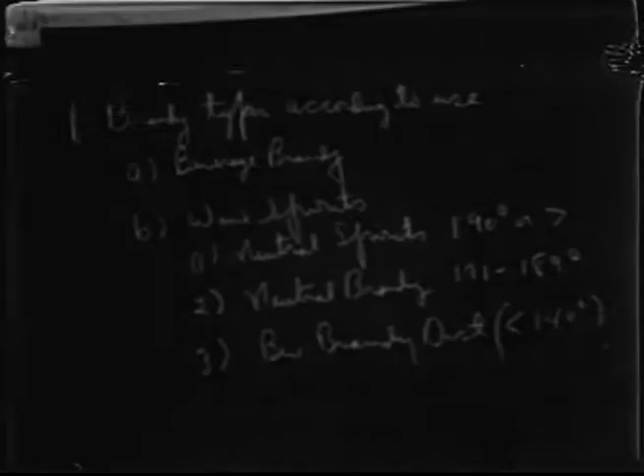Now, first of all, I've made a little brief outline here of a not official definition, but a kind of a definition of the brandy or distillate types as in accordance with their use in the wine industry. Fundamentally, there's two types produced, as far as purpose is concerned. The first is a beverage brandy, or beverage brandy distillate. Strictly speaking, we speak of a beverage brandy distillate as a material that's produced directly from the distilling equipment by distilling wine, and the characteristics of this legally is that the maximum proof of distillation is 170.

This is a rather simplified definition, and the legal definitions or standards of identity for brandy are rather complicated, and you arrive at this by eliminating the things that cannot be, rather than a straightforward definition. But in effect, brandy that is intended to be aged in wood and eventually sold for sale as a direct product, or beverage brandy, is generally made out of distilling material that is equivalent to the whole grape, that is a standard wine. Cannot be residue material, otherwise it would incur the appellation of residue brandy. So beverage brandy is made from wine, or essentially the whole part of the grape. And the other essential limitation is that it has to be distilled at 170 proof or less.

The purpose of that, ostensibly, is to ensure that it has flavor components retained in the distillate. Strictly speaking, it's not proper to call the distillate when it comes out of the still, which is colorless of course, beverage brandy, because it doesn't really become beverage brandy without qualifying terms until it has been aged in wood for at least 2 years and then bottled. We're getting into a few side points here which do refer to the legal aspects. For example, the law requires that beverage brandy be aged at least 2 years in barrels or in wood. And if it's not, it's called immature brandy.

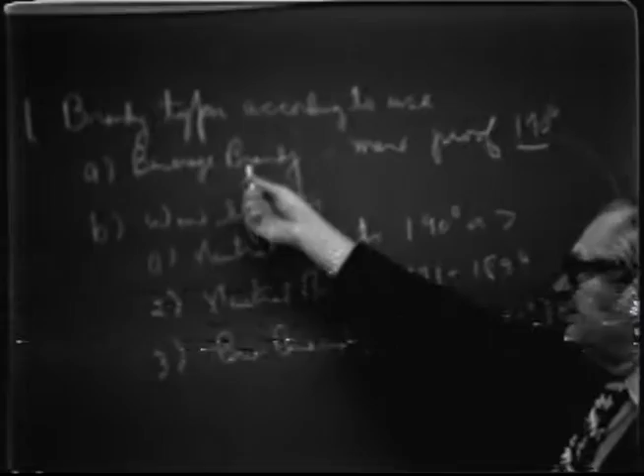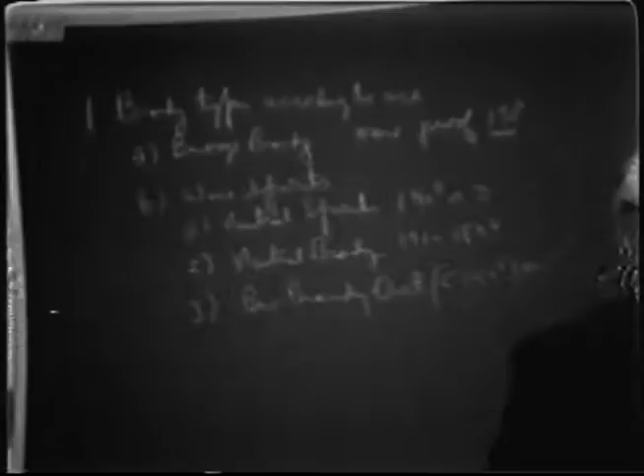What's the difference between beverage brandy under 1A and beverage brandy distillate under B? None, that's the same thing. This is just a classification according to usage. This particular material, although it's beverage brandy distillate, is primarily produced for the purpose of eventually selling a beverage brandy. That material can be used for wine spirits, as wine spirit - so there's some slight overlap.

Can number 3 be made from residue, or would that just be how it's labeled? No, beverage brandy cannot be made from residue, otherwise it would be called residue brandy. So the law doesn't preclude you from making residue brandy out of waste material, aging it in wood and bottling it, but the label has to say residue brandy, so no one does that. The law also doesn't preclude distilling at 180 proof, aging in wood and selling it as brandy,

but it has to have the word neutral on the label, so no one does that. But if they decide the advantages might override the disadvantage, or what they might presently call the stigma of the word neutral, they're perfectly permitted to do so.

This leads us into a little discussion about distillation itself, and perhaps an attempt at some definition of the word distillation. Most of you are aware of what it means - it's a process by which you cause a liquid to be converted to a vapor by the application of heat energy, followed by the removal of that heat energy by cooling and condensation. The condensate then represents a product which has effected some separation.

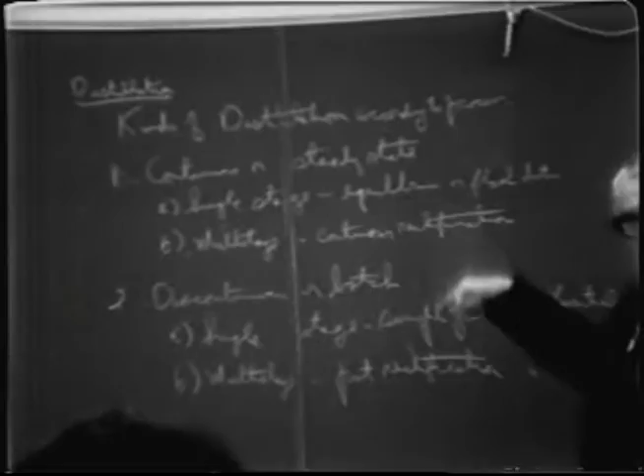But anyway, I wanted to just say a few words about kinds of distillation, classified in a simple fashion according to the process that's used. Later on, we'll have occasion to discuss each of these in turn in some detail.

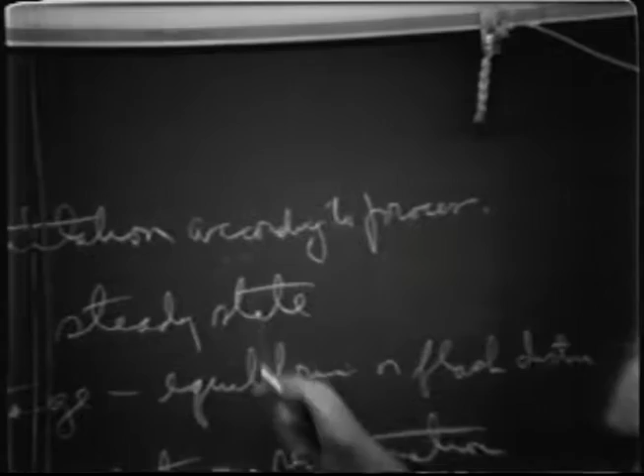So, first of all, I'd like to make the major classification according to the process into whether it's continuous or steady state versus discontinuous or batch.

As I think I indicated yesterday, a continuous distillation or steady state process is one in which the process, once set in motion, involves the introduction of a feed material or materials, that may be more than one, into a process at the same rate at which the end products come out, so that there's no depletion or accumulation in the middle.

Now you can have a little modification of continuous processes in which you do have either an accumulation or depletion of some component within the process, but in most cases in distilling, we're talking about a completely balanced process.

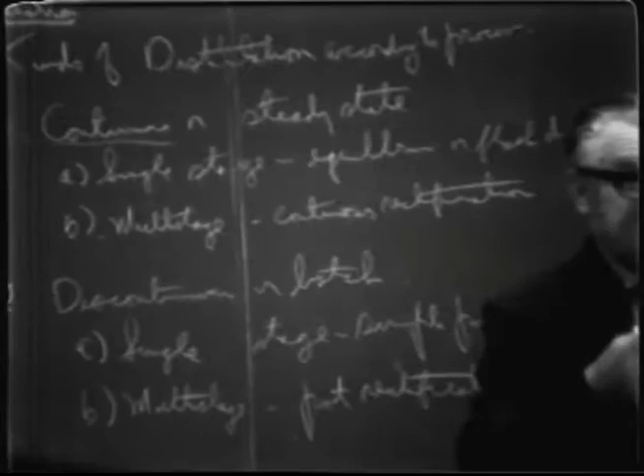Then we can classify this into one stage or one step of distillation. In other words, if you take a liquid and add heat to it and produce a vapor and condense it to a liquid, we have applied one stage of distillation. And we effect a certain separation, depends on the characteristics of the components.

The basis of distillation, to digress just slightly more, is the differences in vapor pressures. If we take ethyl alcohol and water in a mixture, generally speaking, ethyl alcohol has a greater vapor pressure than water.

So when it becomes a vapor, there's a relatively greater concentration of alcohol molecules in the vapor phase than in water. So when we condense it to a liquid, we have an increase in the alcohol content in the distillate. But water still has vapor pressure, and so a certain amount of water comes over.

Roughly speaking, if you took a 10% alcohol solution, the first distillate that'd come over would be around 5 times as much, maybe about 50% alcohol. As long as it was still 10% in the liquid, the vapor would be around 50%, roughly. We'll go into that more. We have charts which we can show exactly what it is.

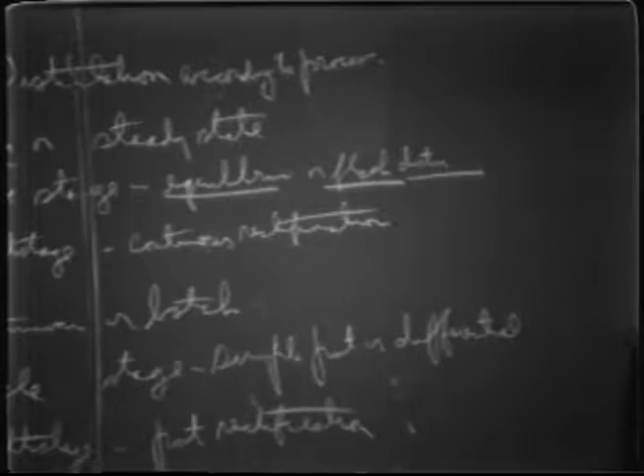So, we get a certain concentration in a single stage process, I mean, in a single stage of continuous distillation. In actuality, a single stage continuous distillation is not particularly used, that I know of, in beverage industries for production of alcoholic spirits.

But it is a useful process, and it involves what we call flash or equilibrium distillation. We'll talk about that more later, but this is sort of different than the other 3 types in that we don't use it directly in producing alcoholic beverages or distillates.

But the process that's most widely used, at least in the United States, for producing alcoholic distillates is the type we might call multi-stage continuous distillation, called continuous rectification, or rectifying distillation.

And I'll just go through this chart, and then I'll come back to that. But in effect, we accomplish this by having a column, which has several stages of vaporization, condensation. In effect, trays or plates in a fractionating column. We call it a fractionating column.

And so we have a repeated, in effect, a repeated vaporization and condensation, so enrichment at various stages. Several steps. A distilling column may have 10, 20, or up to 100 different stages in it, depending on what the function is and the purpose.

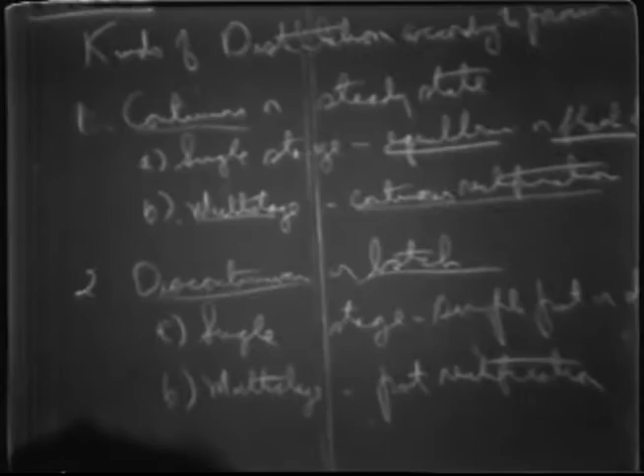Then we have discontinuous distillation, more commonly called batch process. And strictly discontinuous or batch process involves putting a material into an apparatus. As far as distillation is concerned, applying heat to the material and causing it to vaporize and collect the distillate, but no addition is made to the pot or the boiler until the process is ended.

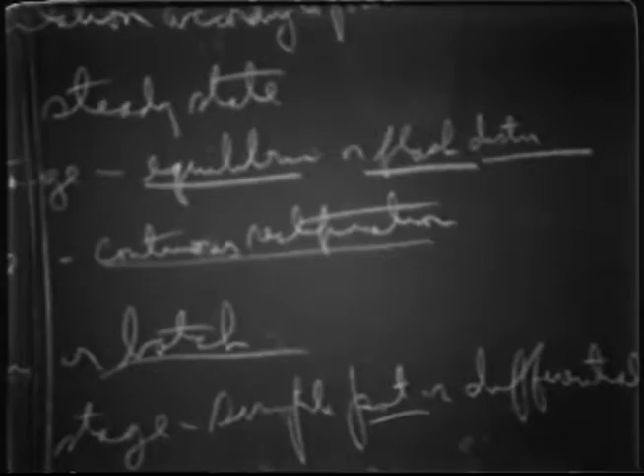So consequently, in the general nature of batch distillation or pot distillation, simple pot distillation, if it's only one stage, is that you have, as a function of time, a continuous change in the composition of the liquid in the boiler or the pot, as well as the distillate, naturally. And so you do not get a uniform distillate.

In contrast to that, with continuous distillation, we assume we have a constant feed material going in, so that the composition inside the vessel does not change and the distillate does not change as a function of time. But in batch distillation, it does change during the time of the process.

In the continuous process, isn't there a collection of some water? If the alcohol is coming off faster and the water's remaining behind, even though you're feeding in more of the beginning material? No, in a true continuous distillation, whatever water doesn't appear in the product goes out another product, the bottom product or waste, stillage, at the same rate that it enters. So what comes out is not only the distillate but also the waste, coming out in the same proportion.

I'll draw you a sketch of one in just a minute to show you the general process, and then in the laboratory today we'll have a look at our little pilot column, which shows you its features. So then let's conclude this outline.

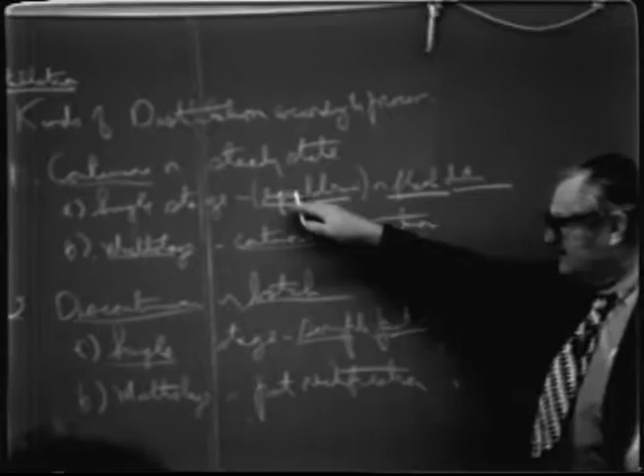Later on we'll stress the reason for those words. Now, just as we did here, we can have multi-stage, and we accomplish this by having a pot with a rectifying column or a plate column on top of it or connected to it. So we can effect, even in batch distillation, a significant concentration up to the desired level.

Let's say in one step, one process, or one operation, if you have a rectifying column attached to the pot, by pot rectification, you achieve the necessary concentration.

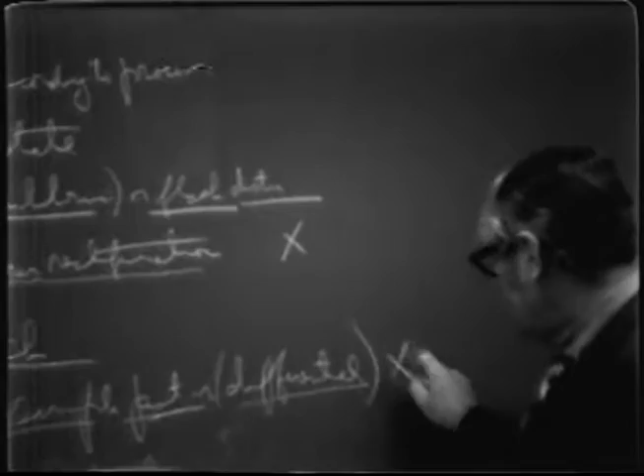Now let me say that this method and that method and this method are all used in the wine industry and the alcohol industries to produce alcoholic beverages. In California, the most commonly used method for producing beverage brandy and wine spirits is continuous fractional distillation.

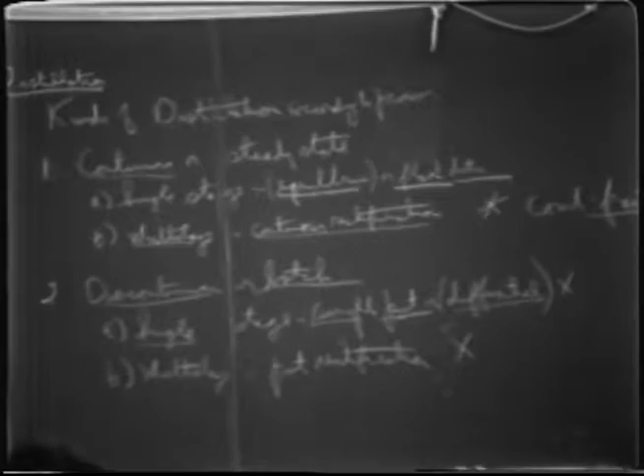However, the use of batch processes has considerable importance in the world, though very limited extent in California. I might point out that using a simple stage or single stage pot distillation, you normally do not produce sufficient concentration of alcohol to accomplish the desired end. So it is repeated at least once, sometimes a total of 3 distillations, but usually 2 successive simple distillations is the process used for producing cognac, for example, in France.

In fact, it's the process we'll talk about more in detail. That's so widely used that it's called the Charente method, Charente being the geographical department where cognac is located, or méthode charentaise.

2 successive simple distillations are also used in the Highlands of Scotland to make what we call the all-malt whiskies of Scotland, those which contribute most of the flavor to scotches, even though they're sold mostly as blends. This is another subject, but generally speaking, Scotch whiskey, you'll notice on the label, says blended Scotch whiskey.

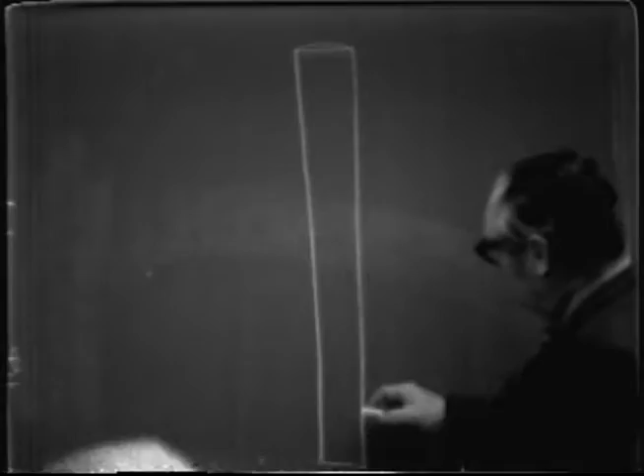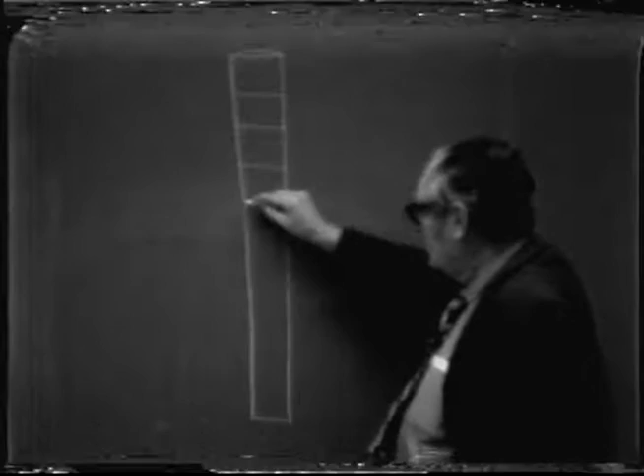The apparatus by which we can conduct continuous rectification, fractional distillation, usually consists of a column in which we have a series of trays or plates. Now, these may be of various designs, but the most common is what we call bubble caps.

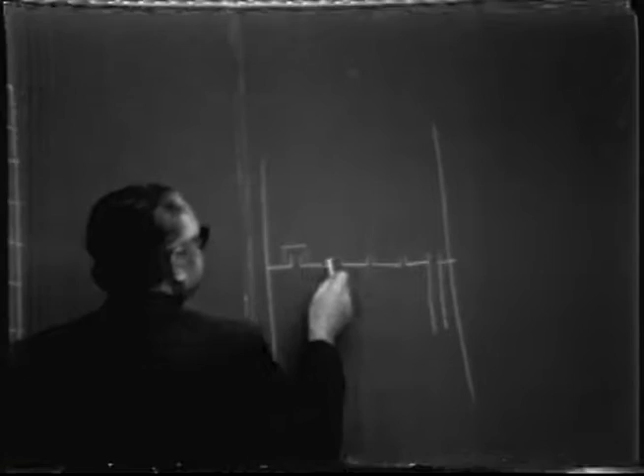A bubble cap tray or plate is a device that has, if I draw just a little cross-section on a larger scale here, a series of holes with risers, and over these holes are caps, called bubble caps.

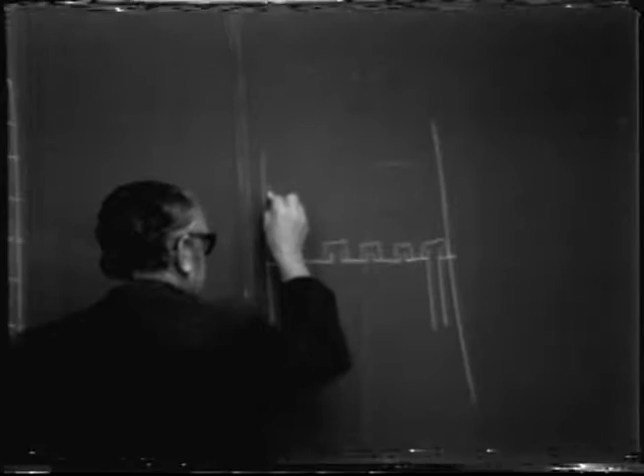From the tray above, which I won't sketch, there'll be liquid overflow coming down, an overflow liquid running down here. This could be in the stripping section, and would be the wine primarily flowing in here. Oh, excuse me, I didn't intend to put a cap over that one, because this represents the overflow down to the tray below.

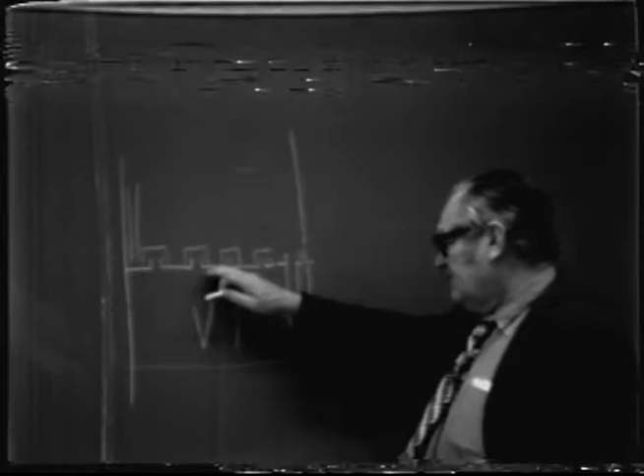So in functioning, we have a vapor produced at the base by steam or heat, and this ascending vapor rises up through here, and by the nature of this tray or plate, a certain level of liquid is trapped here because it has no way of getting out except to overflow at this weir, what we call the weir.

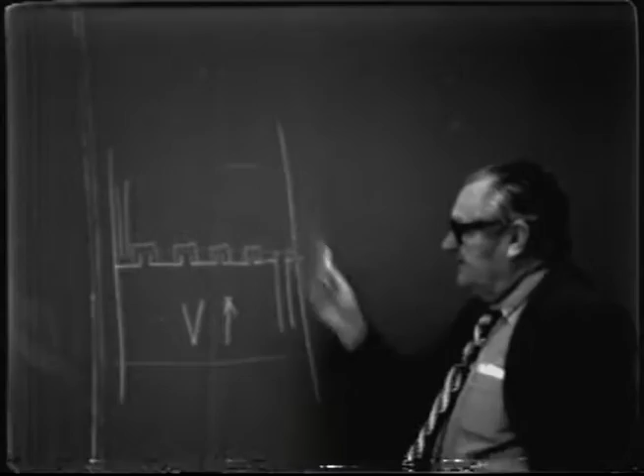The weir can be just the perimeter of the projection of that tube, or it can be some other type of weir that controls the liquid level on the tray. But anyway, the primary function of a tray or plate is to provide some mechanism by which ascending vapor can interact with, bubble through, or react with a descending liquid stream.

In effect, we produce what we consider one stage of vaporization at each tray. The liquid running down will give up some of its more volatile component to the ascending vapor, so that the vapor rising will be somewhat enriched in the more volatile component, in our case alcohol, and the liquid overflowing will be somewhat deficient in the more volatile component, namely ethyl alcohol.

This process is repeated from step to step, and eventually we have sufficient concentration of the more volatile component toward the top to produce our desired product, and we have sufficient removal of the more volatile component from the water phase by the time it reaches the base, to satisfy our requirements or specifications.

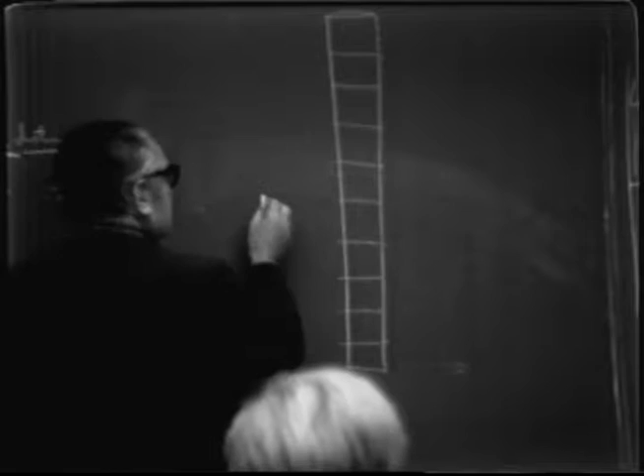Now, in reality, the simplest type of a continuous distillation column consists of two sections, divided by the point at which we introduce the feed, or the wine. Continuous distillation is used for many things besides wine, so the general engineering term would be feed, or the material that goes in to be separated. But in our brandy industry, the feed material would be the wine, or the wine-like material.

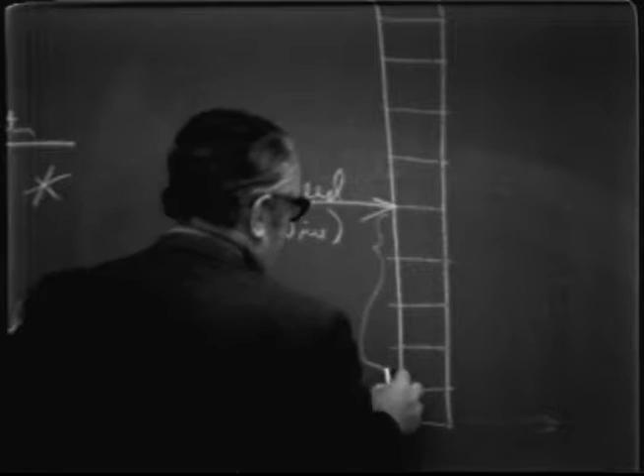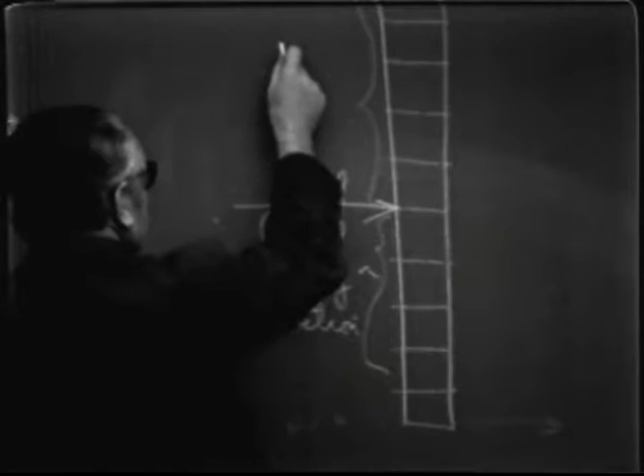We speak of the part of the column below the feed as the stripping or wine section. And the part above the feed is spoken of as the concentrating or rectifying section.

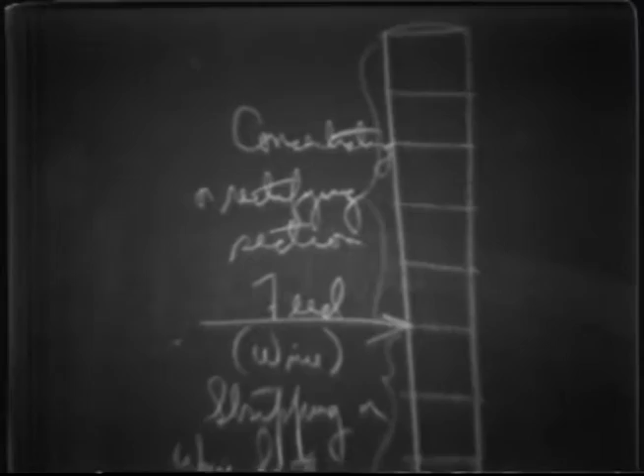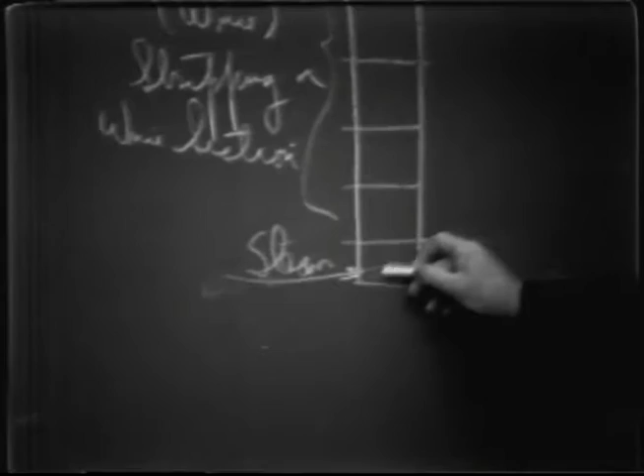So in its simplest form, we have to have a feed material, and some mechanism of starting the vaporization process. The simplest way in the case of alcohol water is to introduce direct steam in the base. That's frequently done through a little perforated tube or ring called a sparger, which the live steam mixes directly with the liquid and produces the necessary vapor and heat.

Although this isn't the only way it can be done. It can be done by heat exchanger, so that you do not have direct mixing, in which case we call it a reboiler or calandria heating. Our little pilot column is equipped for both.

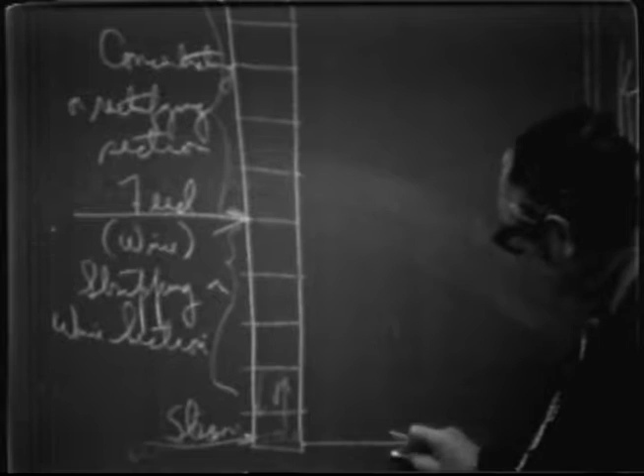This produces the ascending vapor, and eventually the liquid appearing in the base goes out as a bottom stream. In the alcohol industries, the common term is stillage.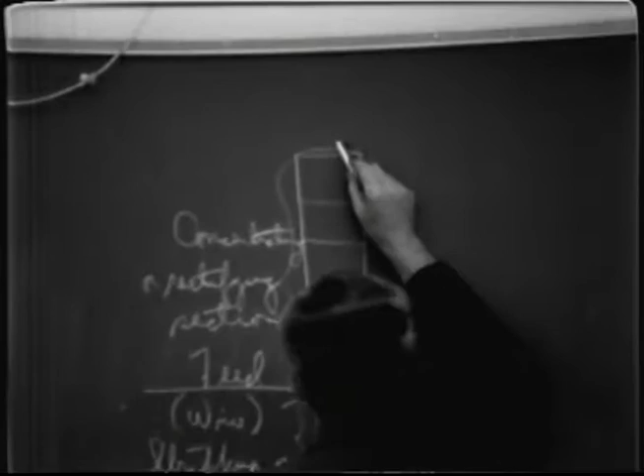Or you could say de-alcoholized wine if you'd like, but stillage is the engineering term. Then in its simplest form, the vapor arising from the top plate would pass off to a condenser. The condenser may be various designs, either vertical or horizontal. It usually is tubes encased in a shell, and the vapor is condensed in the vapor space outside the tubes, but I won't go into the details of that.

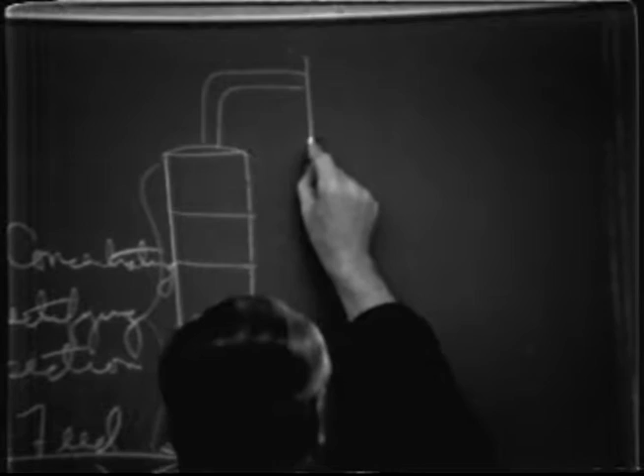Suffice to say that can be represented by a little rectangle here, in which these lines represent tubes. Instead of just 2 or 3, there'd probably be maybe 100 in here. And so the vapor is condensed around the tubes.

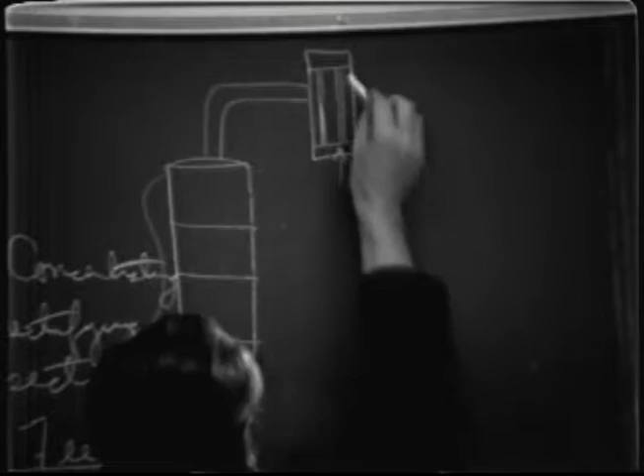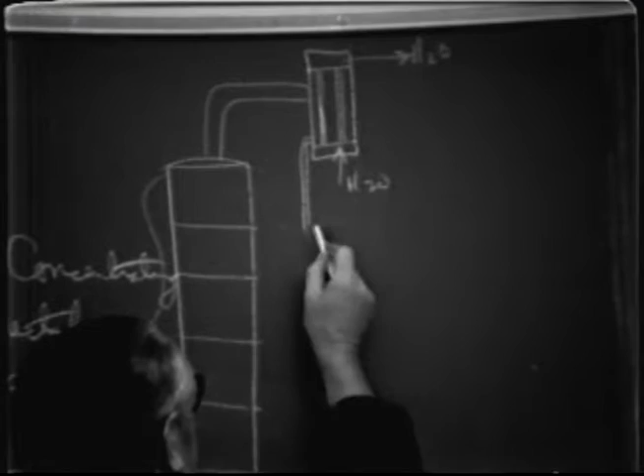Water goes in here, and water goes out here. That is cooling, condensing water. And the distillate comes out here.

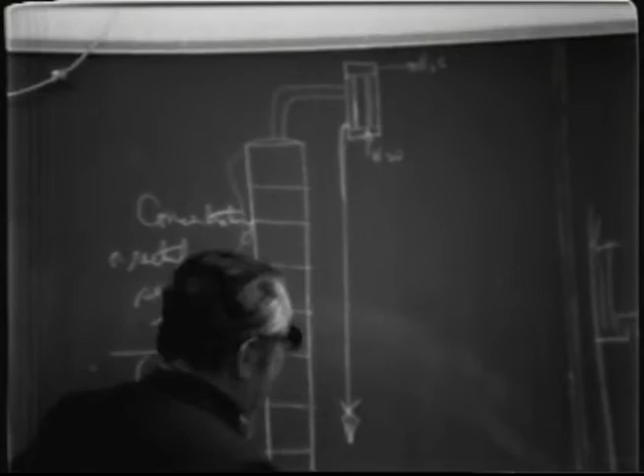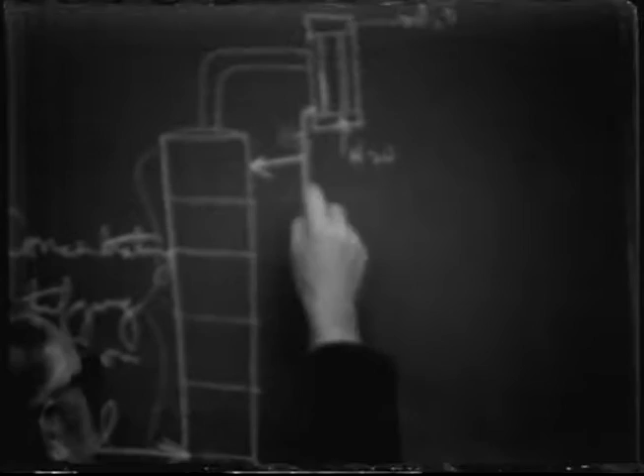Some of it may be taken out as product, controlled by a valve, but a good part of it has to be returned to the top tray of this column as what we call liquid, or reflux, or liquid overflow, and this would be the distillate.

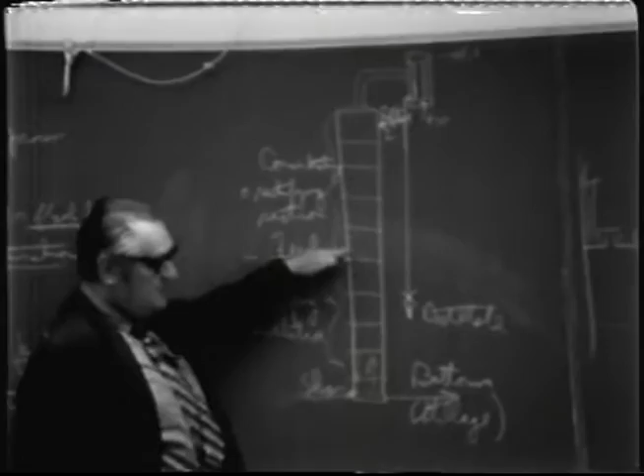Now that would be the simplest arrangement for continuous distillation, where you have a single feed material going in and you separate into a top product and a bottom product. We call it the top product and bottom product because the distillate came from the top of the column and the bottom from the lowest part of the column.

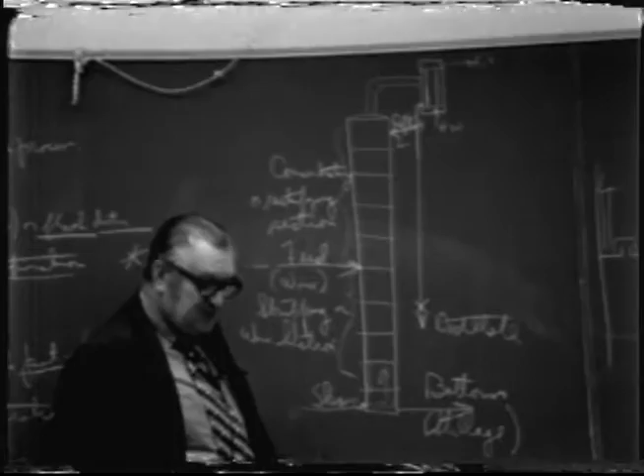In reality, we don't use this exactly anymore. All this used to be the process, but in practice, I think I might as well re-sketch that to make it clearer. We separate the feed material into at least two streams of two different products, and sometimes three.

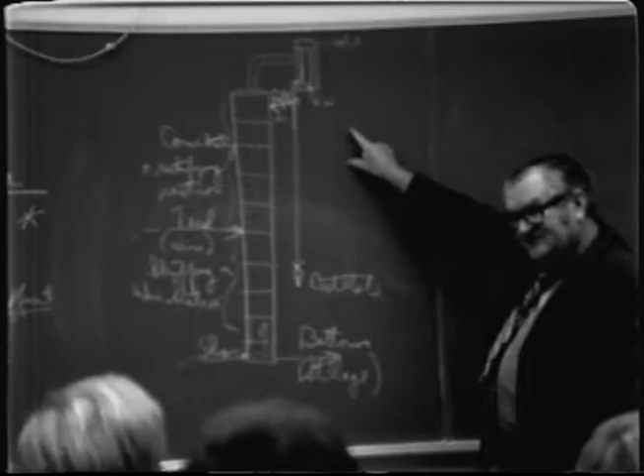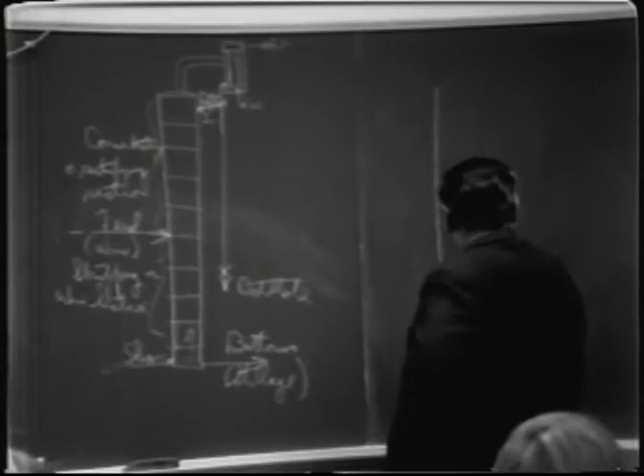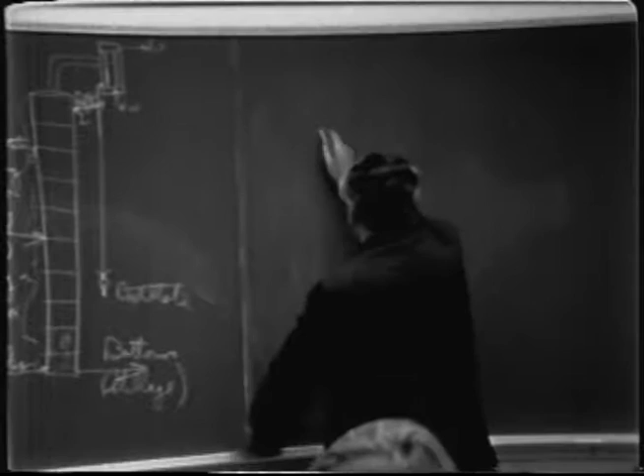We may use more than one column to do it, and more than one section, more than two sections. But the usual setup for brandy production, beverage brandy production, is very similar to that, except we have the feed going in here, the wine, and we still have the stillage coming out. There's no change here.

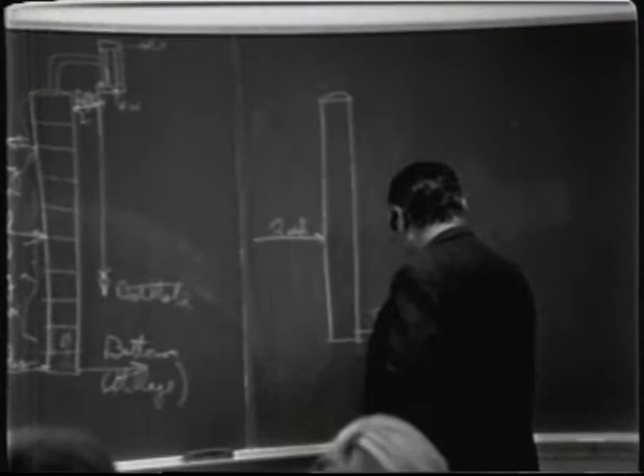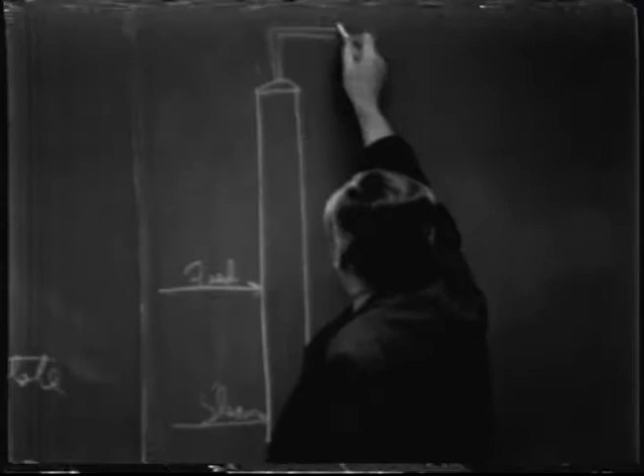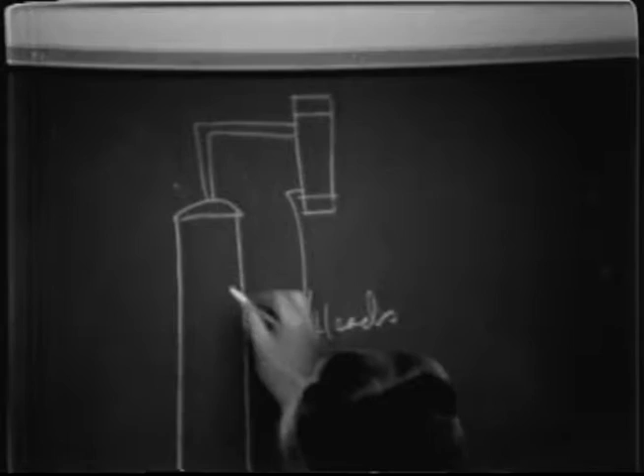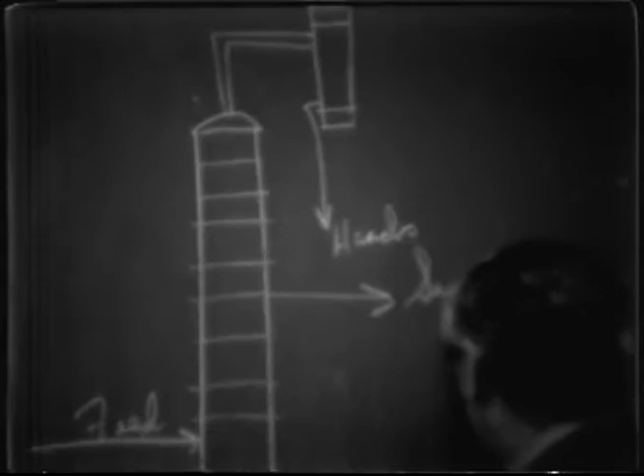We have steam going in here to supply the heat. But now, instead of taking the top product off as the main product, we take some of this and call it a heads product, a rather small part of it. The main product will be drawn off as a boiling liquid from one of these trays here. We call this a side stream product, or side stream. And this might be the main product.

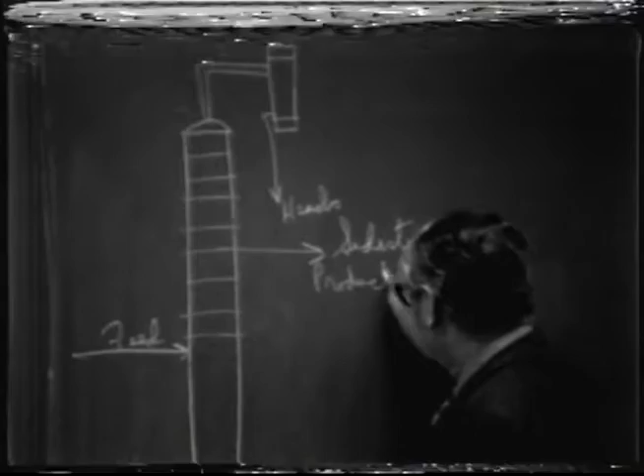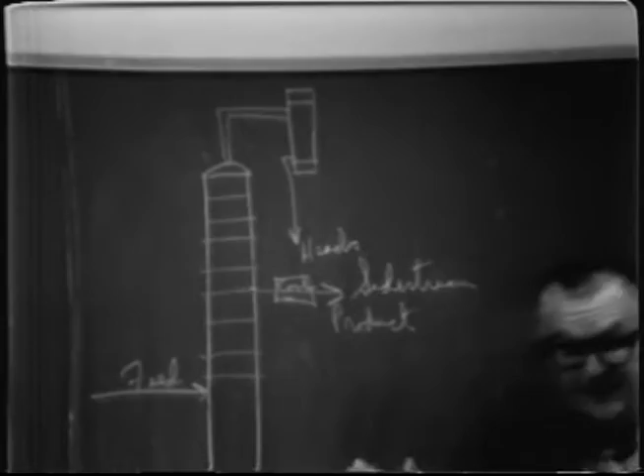In fact, that is the case for beverage brandy and other types of brandy distillates. Of course, this goes through a cooler in order to cool down this boiling liquid to an acceptable temperature. And again, we have liquid run back here as reflux or overflow.

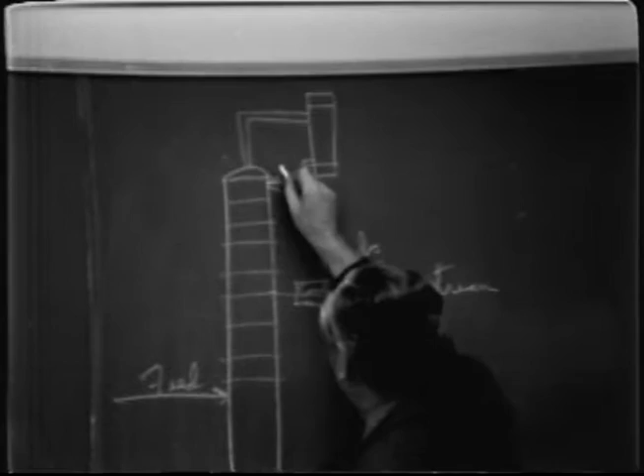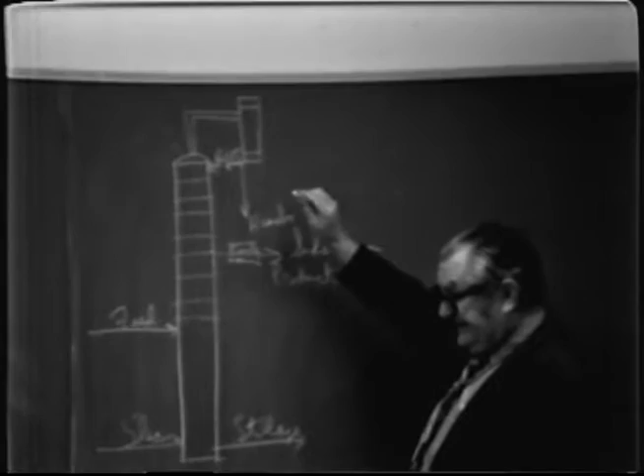So in other words, we've separated the feed not only into the de-alcoholized wine, but into what might be a high alcohol material testing around 190 proof, containing a relatively higher concentration of low boiling constituents like aldehydes, ethyl acetate, and sulfur dioxide if it happened to be present. Into the head stream, the main product coming off here is the side stream.

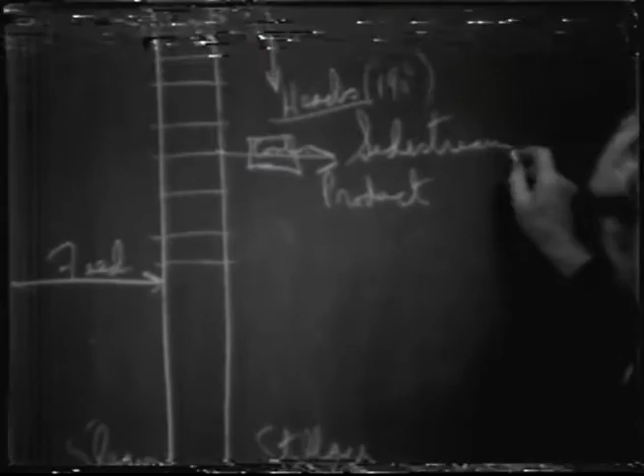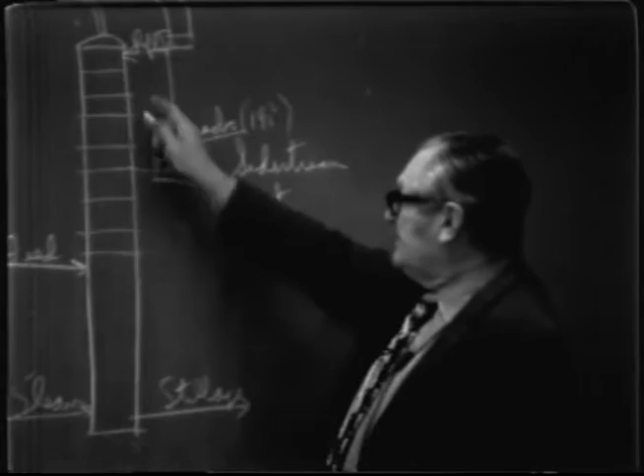Now, in the case of producing neutral brandy or wine spirits, this side stream product might be a little higher up here, and we probably have more plates, but we might also draw off a stream here which would separate fusel oil, or the higher molecular weight alcohols.

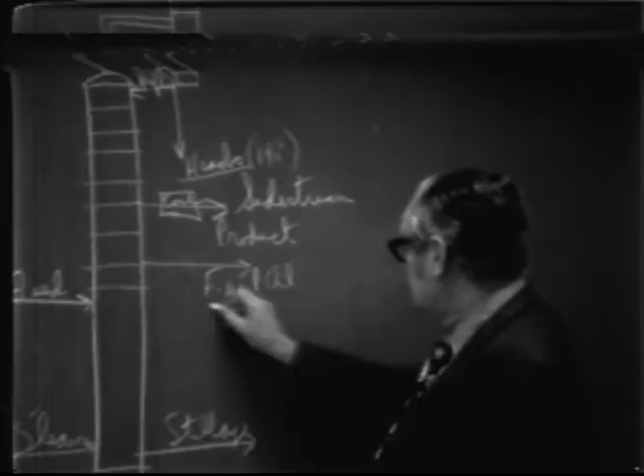We don't have time to go into that today, but it's almost necessary if you're producing neutral spirits that are in reality neutral to take out an oil stream or a fusel oil stream, because the higher alcohols, like isoamyl alcohol...

It's almost essentially impossible for them to distill in the range of 190 or 192 proof, so they accumulate in the middle of the column, and if they're not taken out, they'll reach such a concentration in the middle of the column that they'll interfere with the operation. So they're removed, not only for that purpose, but to ensure they're not in the product.

In the case of beverage brandy distillation, if it's truly distilled at 170 proof or less, it is difficult to make. Well, it's impossible to do it in a simple separation, as we can in high proof distillation, to remove the higher alcohols. There are some techniques I'll later talk about that can be done, however, to minimize or lower fusel oils in the distillate for beverage brandy purposes.

Well, with that sort of sketchy outline of what we're about, we'll conclude this talk and this period, and then I'll just say a word about what we're going to do in the laboratory, but I'll explain it when we get there.